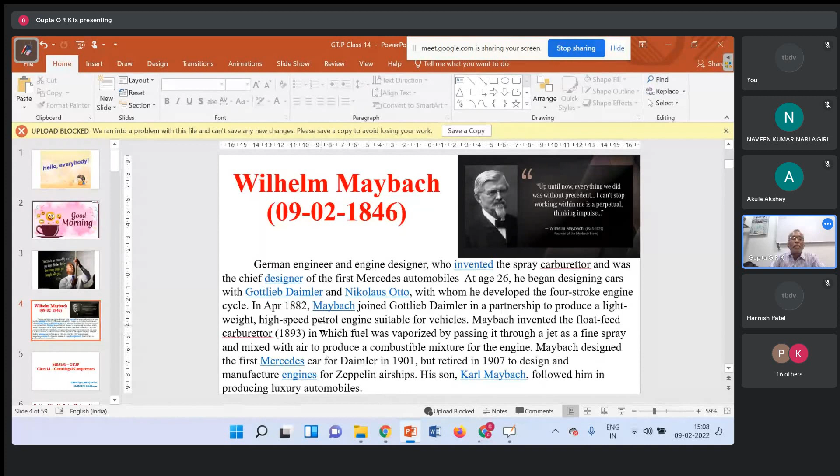Okay, today we deal with centrifugal compressors. And before going to that, we will see what we have discussed in the last class. So we have discussed about the basics of turbo machinery.

There, the velocity at which the fluid enters is the absolute velocity of the fluid, and the blade itself, because it rotates, has blade velocity, which is 2 pi n by 60, that is omega, angular velocity, but blade velocity is r omega. That's where you get the absolute velocity. And because it is rotating, the velocity at which the blade faces the fluid is called the relative velocity. We have seen the relation between absolute, relative, and blade velocities.

Each velocity, absolute and relative, is resolved into three mutually perpendicular components: one is axial, another is radial, another is tangential. So when it enters at some velocity and leaves at some velocity, whenever there is a change in velocity because of the change in momentum, there will be force in that direction. So there will be three forces: axial force, radial force, and tangential force.

Axial force, which is not useful for rotation, has to be taken care of by thrust bearings. Similarly, radial force is also not useful for rotation, but it has to be taken care of by either roller bearings or ball bearings. The third one, tangential force, is the one which is useful for rotation.

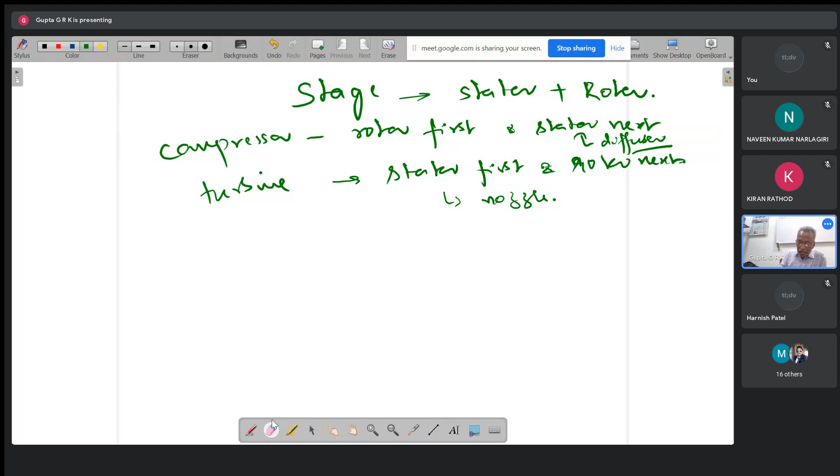Entry to the compressor is always axial. At the exit - if axial, it is an axial compressor. If radial, it's a centrifugal compressor. And otherwise, a mixed flow compressor.

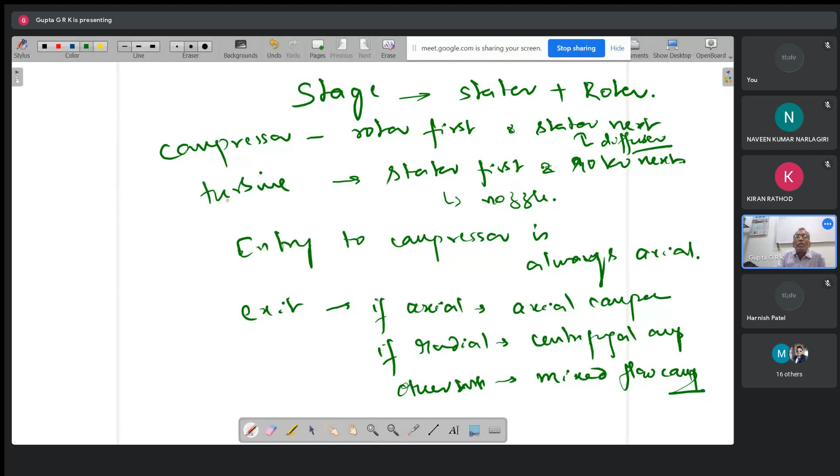Then another thing is the impellers - the rotor is also called the impeller, and the stator is called the diffuser. And we have three types of impellers.

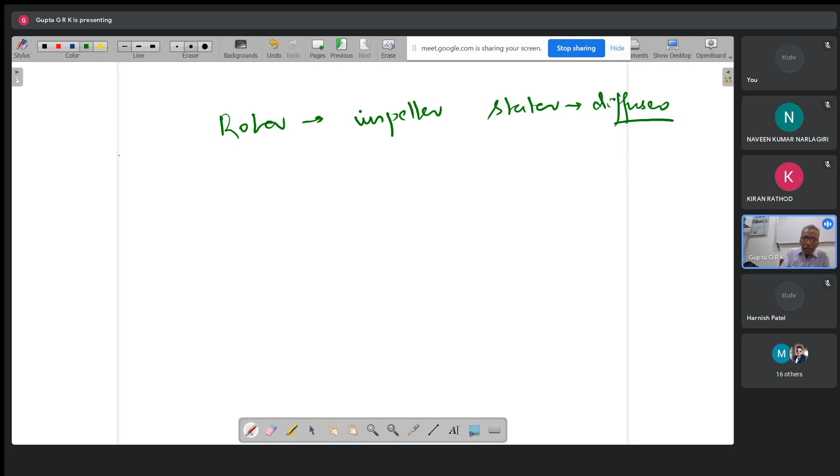This is the hub or shaft, suppose rotating this way, and the blades at the exit can be bent like this. If you see this bending - because it's rotating this way and the blades are bent opposite to that - these are called backward curved vanes.

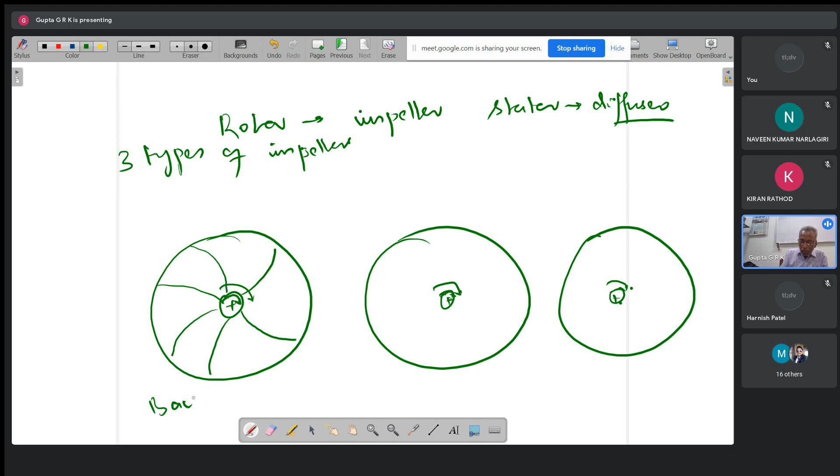And it can be like this - these are radial vanes. Forget about how it looks like at the center; at the exit, if it's like this and they are bent this way, with rotation in the same direction and blades also bent in the same direction, these are called forward curved vanes.

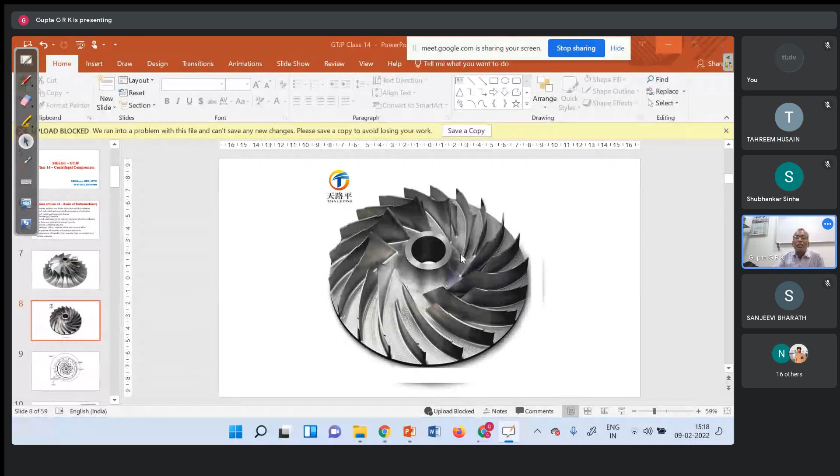If it is rotating in this direction, the blades are bent in this direction, so it is backward curved. Is it clear what I am telling? Yes, sir.

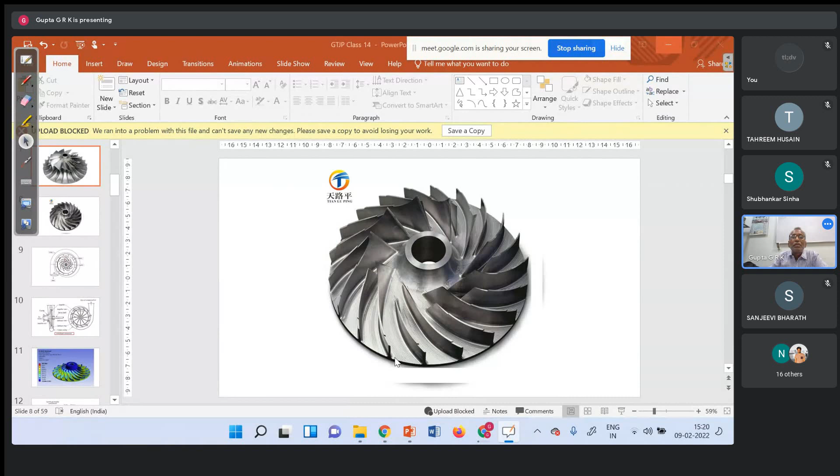It actually goes through, and also at the entry, before the entry to the impeller, there may be some vanes, which are called inlet guide vanes. I will tell you about that also.

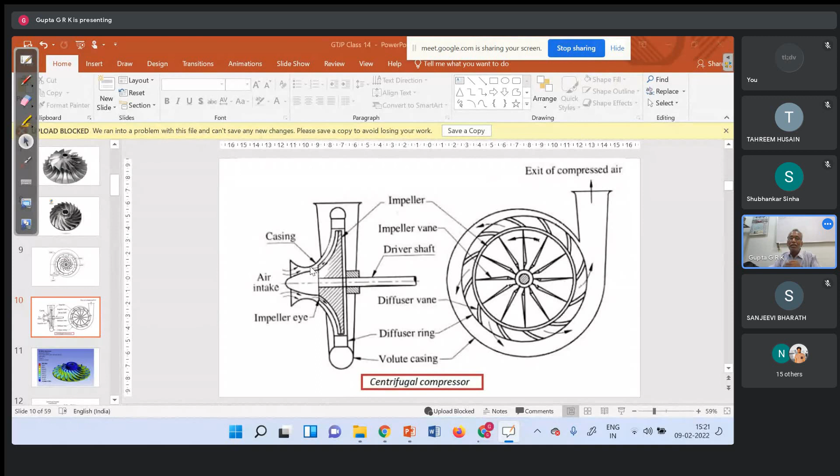So usually if I have all the components in an engine, so a compressor, first the air enters the bell mouth, then it enters the IGV, which are called inlet guide vanes. Then it enters the eye of the impeller, that is the inlet to the impeller. Then it enters the inducer. The inducer is like a transition piece from axial to radial direction, because it enters axially, then it turns to the radial direction. And then the impeller vanes.

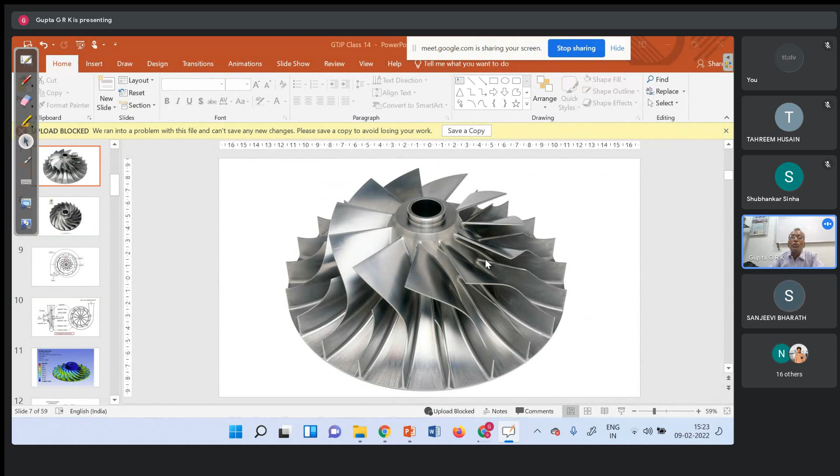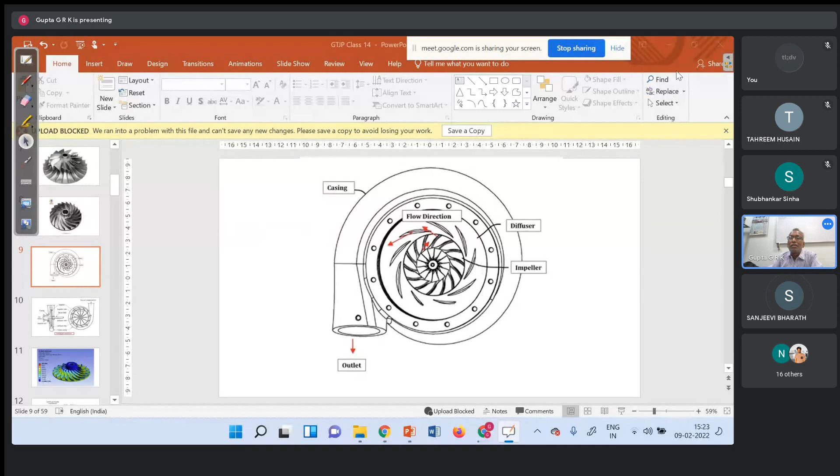Sir, for axial compressors, there won't be any inducer. Actually, this inducer and impeller is an integral part. Sometimes the inducer part is cast separately and the impeller vane separately, and they are welded together, or it can be a single piece. This bent portion, if this is the whole blade, this bent portion of the blade is called the inducer. We are talking about the centrifugal compressor only, not the axial compressor.

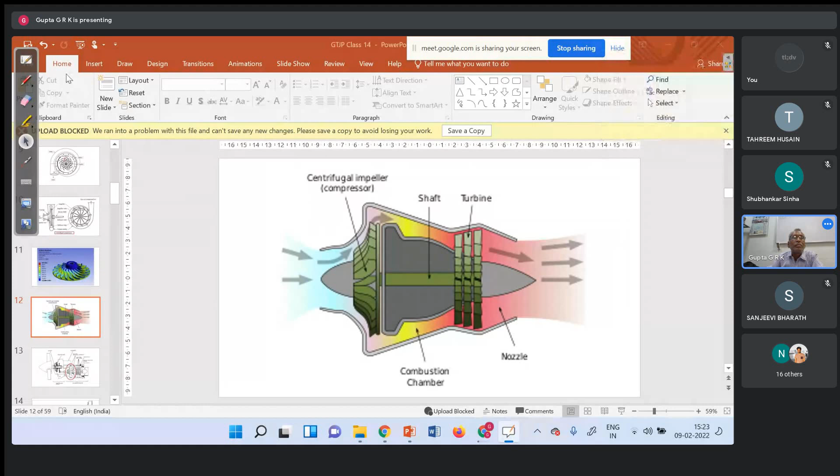Then impeller, and then there is what is called vaneless space between the impeller and diffuser. When it is coming out of the impeller and entering the diffuser, there will be some space, otherwise it will hit, isn't it? Between the diffuser and impeller there should be some vaneless space so that it rotates freely. So it enters the vaneless space, then the diffuser, then the volute casing, then exit. First it enters the bell mouth, then inlet guide vanes if at all present, then eye of the impeller, then inducer, then the impeller vanes, then vaneless space, then diffuser, then volute casing, and it comes out of the exit.

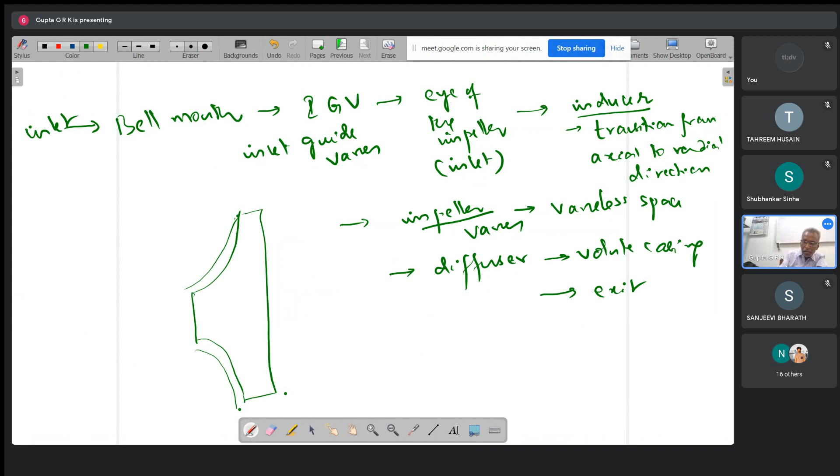Sir, could you please show the bell mouth? Bell mouth, okay, it's the entry. So suppose this is the impeller, and this is the casing, like this. And here at the entry, it will be like this, so it takes air from all over.

And here there may be IGV - this is bell mouth. IGV is optional - inlet guide vanes, they're optional. They might be present or might not be present. I'll tell you what is the use of that. There may be IGV, there may not be IGV.

This part is the shaft, and this part is the inducer, and this is the diffuser, like this.

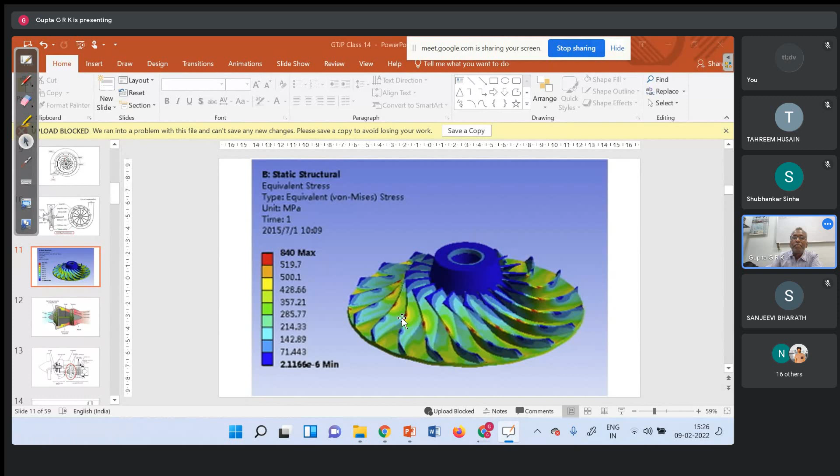So this is one CFD result showing the variation of stresses and all. So here, if you have a single compressor in a jet engine, it will be like this.

Just taking some photographs. If I have a multi-stage centrifugal compressor - normally now it is not used, but in olden days they used this. You can see now from the exit is radial, and the inlet for the next compressor is axial. So I have to turn it 180 degrees like this, then only it can enter into the next compressor. Because of that, we lose a lot of pressure here, so this is not preferred. Is it clear why this is the problem with this?

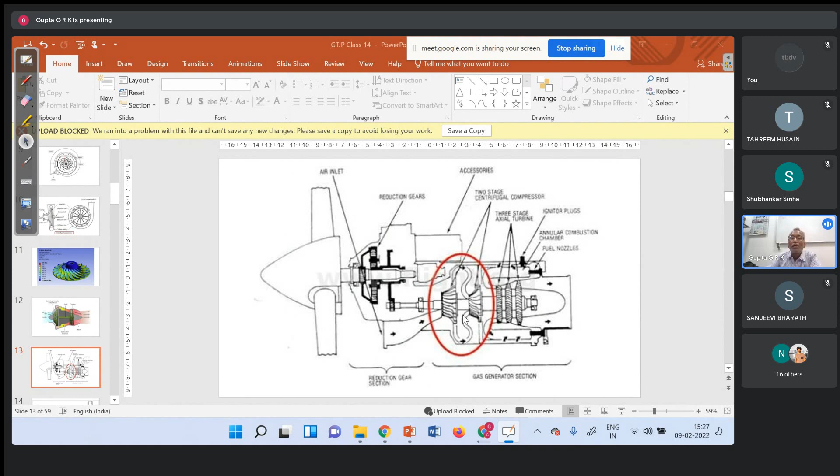So this is a turboprop engine, you can see. Previously we used to have like this. Now, actually, these are various types of axial compressors. Now this is axial compressor.

Presently, if you want a large pressure ratio, instead of having a multi-stage centrifugal compressor, which gives large pressure but we lose it, and the axial compressor, if you want a large pressure ratio, you have to have so many stages - if I have few stages of axial compressor combined with centrifugal compressor here, I will have a very large pressure ratio. And not only that, mainly centrifugal compressors are not preferred because of the frontal area.

I will show you. When you compare centrifugal and axial, we will make that comparison - centrifugal versus axial.

High stage pressure ratio - so usual normal is 4:1, and can be up to 6:1 using titanium blades. For high stresses, if I can use blades which can withstand stresses, I can go up to 6:1. But axial compressors have low pressure ratios, some 1.14 to 1.3. That's a small pressure ratio.

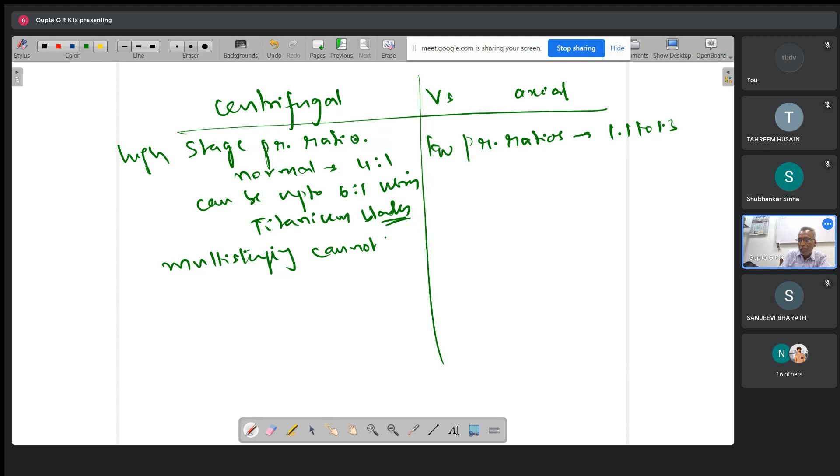But here, multi-staging cannot be done with any number of stages for centrifugal. Therefore, if the overall pressure ratio cannot be met by a single stage centrifugal compressor, we go for axial compressor. So if I want some 10:1, instead of having 2 stages of centrifugal compressor, you can have some 6 stages of axial compressor like that.

So that is preferred. And another important thing is - an axial compressor will be like this, and you will have a rotor, stator attached to the casing, and a rotor and a stator. Like this, I will have a number of stages, and air enters like this, and leaves like this.

And so if I have a centrifugal compressor, if mass flow is equal to rho A C - I can say CA because it is coming axially like this. So if I have some axial velocity and density, with the same density and axial velocity, I want to have an axial compressor or a centrifugal compressor.

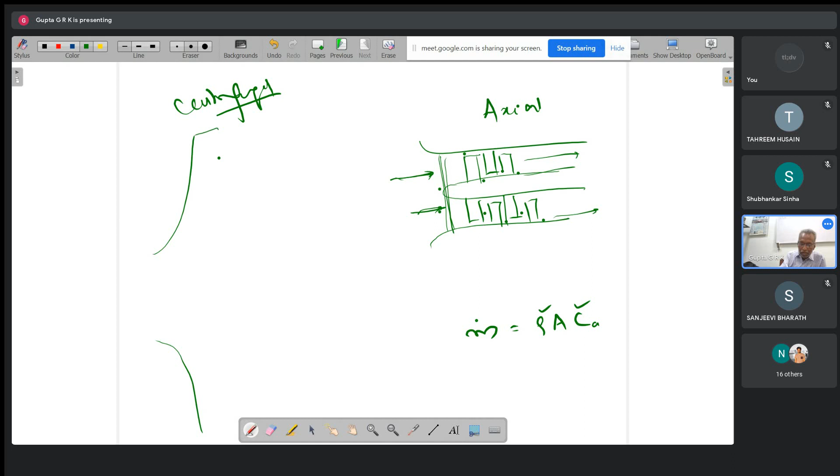So if I want this much of inlet area, and if I have a centrifugal compressor, it will come like this. If this is the inlet area, you can see how much is the exit area. But here, inlet area and exit area are almost the same, or sometimes it will be converging also, because it is getting compressed - the last blades will be smaller and the initial blades will be taller. So frontal area is very high for the same mass flow.

Is this point clear? This is very important.

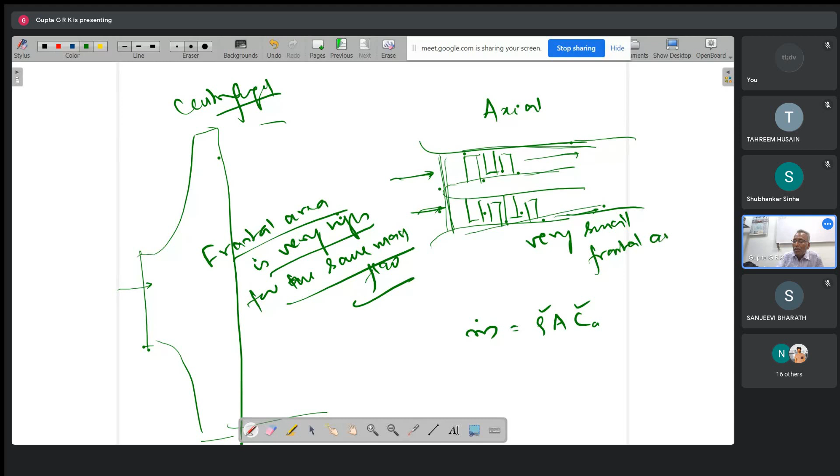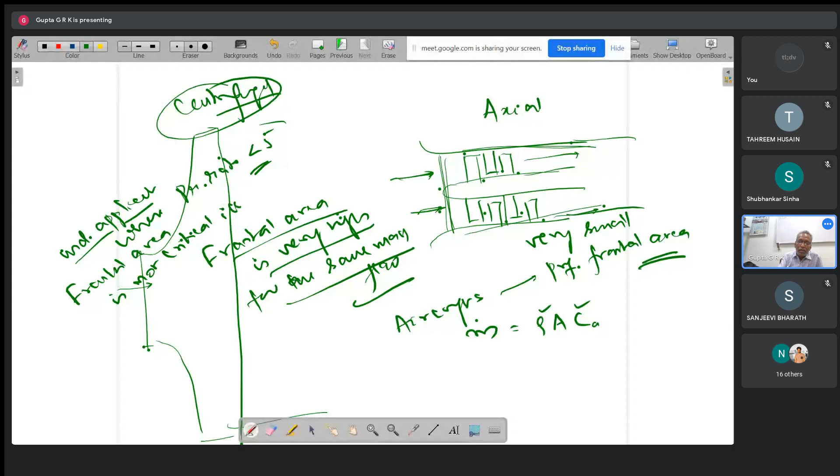That's why in aircrafts, axial is preferred. But in industrial gas turbines, industrial applications, where pressure ratio is less than 5, we always prefer centrifugal compressor. Here, frontal area is not a problem. In industrial applications, frontal area is not a critical issue. But in aircrafts, frontal area should be small.

Is this clear? Any point, if you don't understand, ask me. When I have very large pressure ratio, initial stages can be axial stages, and when the area gets reduced, I can have a small centrifugal compressor. So whatever pressure is here, that will be multiplied by 4 times, so I can have very high pressure ratio. Because the inlet gets reduced, exit also can be reduced. Compared to this inlet area, now inlet area is small, so I can go for centrifugal compressor. So this is the way we can have it.

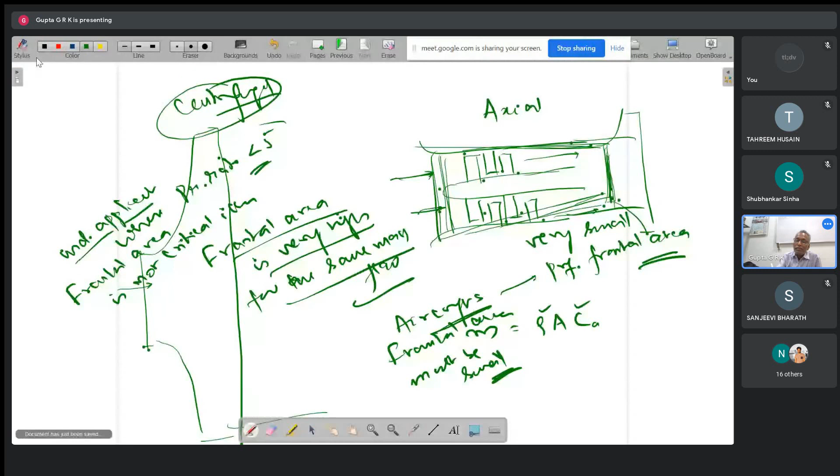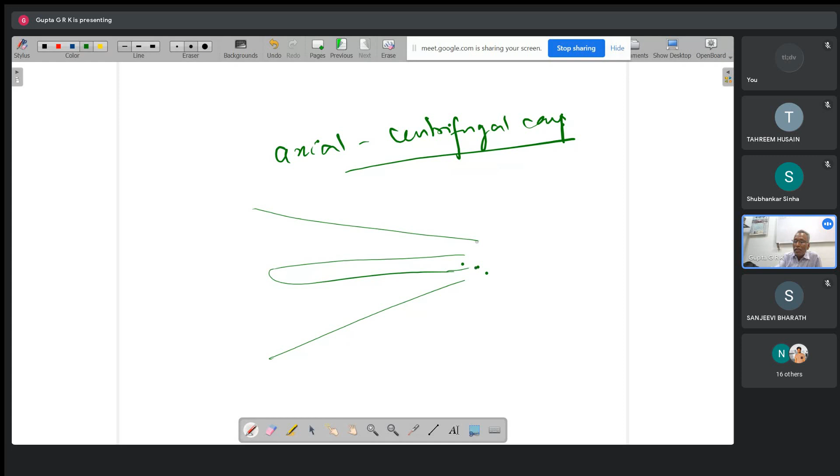You can see axial compressor has decreasing area, the last stage will have very small blades. And here if I have an impeller, frontal area somewhat increases, but not much. This is called an axial-centrifugal compressor. So I can have centrifugal stages like this, and axial here, and centrifugal here, like this. This is the way I can have it.

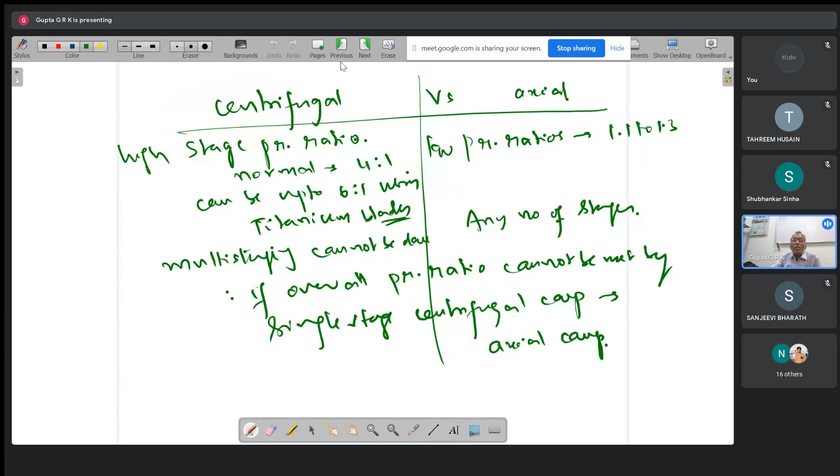Okay, when I compare the other things, I'll go to the next page. Here, this is very simple to design, fabricate, maintain, and cheaper. So this (axial) is costly, difficult to design, fabricate, all these things.

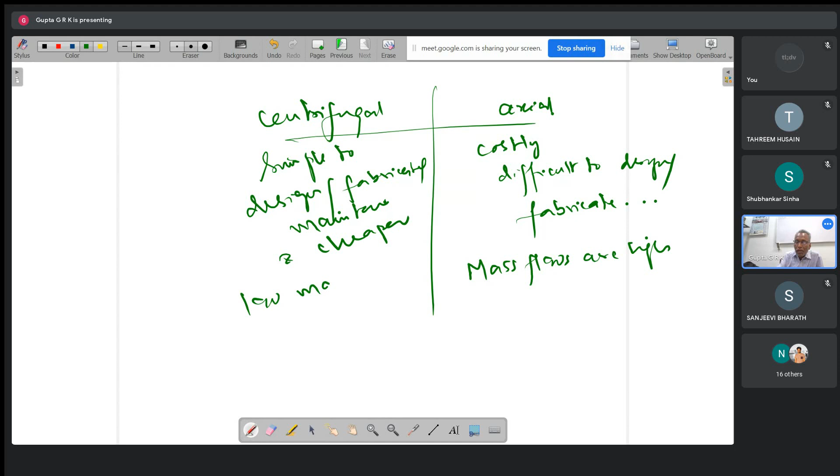Mass flows here are very high for axial, compared to centrifugal which has low mass flow. Always in turbomachines, the mass flow and pressure ratio developed are inversely related. Whenever a machine gives large pressure ratio, it carries only less mass flow. If it carries more mass flow, the pressure ratio will be less. Also, power is equal to gamma Q H, where gamma is the specific weight, Q is the volume flow, and H is the head development. For a given fluid, gamma is constant, so Q and H are inversely related, volume flow and head development. Head developed is pressure ratio, volume flow represents mass flow. So they are inversely related.

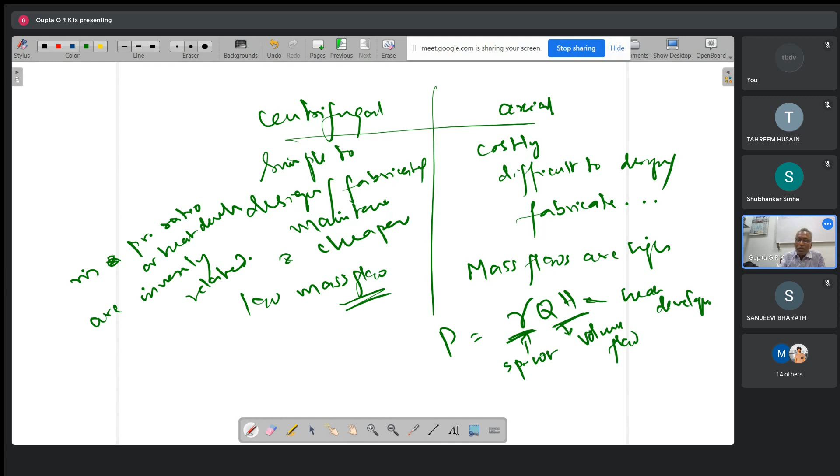And coming to efficiency, axial has high efficiency, and this (centrifugal) will have low efficiency. Axial compressors have that advantage. And another thing is the range of mass flow. How it looks like is, suppose if this is the mass flow, and if this is the pressure ratio, so it looks a bit like this.

So this is something like axial, and this is like centrifugal. Here the range of mass flows - the range of mass flow for axial compressor is narrow, and here range of mass flow is wide. The operating mass flow range is wider for centrifugal compressor and narrow for axial compressor. That is another reason why we prefer it in industrial applications - we may change the mass flows very much, but for aircrafts, because the cruising speed is constant, the mass flows are almost constant during cruising. So that is the reason we prefer centrifugal for industrial applications.

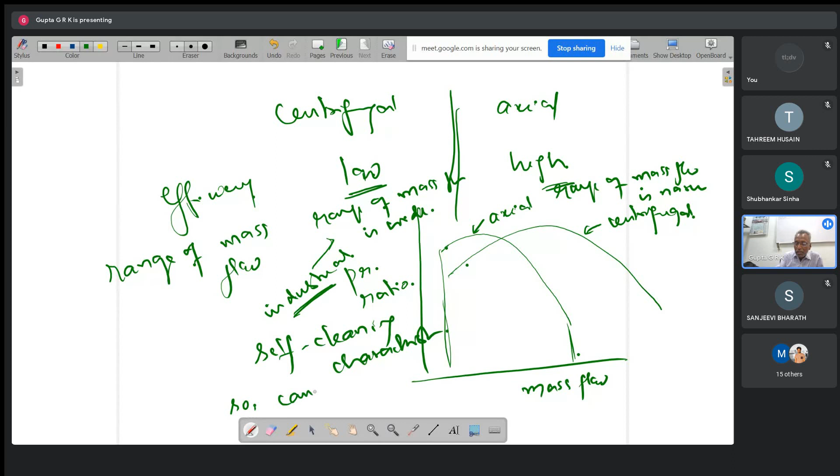Another reason why this is useful for industrial applications is it has self-cleaning characteristic. Contaminated fluids or slurries, muddy things, can be used with centrifugal compressor. Any type of horrible fluid also can be used with the centrifugal compressor, because when I have blades, whether backward, forward, or whatever, it throws away the material. Nothing gets stuck to the blade, it throws by centrifugal force. And the blades also, because they are very simple blades, no problem - even if something gets stuck, it will not be a problem, it will be thrown away. But when you come to axial compressor, where I have aerofoil blades,

centrifugal effect is not much, and if there is some mud or something stuck to the blade, the profile changes, and because of this the performance falls. So if you see, centrifugal compressor is applied and preferred in industrial applications for low flow and high pressure ratios. It has self-cleaning characteristic, it can be used with any type of fluid, and it has wide range of mass flows it can use. Only thing is efficiency is a little bit low, but the manufacturing, maintenance, fabrication - all these things are cheaper and it is widely used. So these are the advantages of centrifugal compressor. Any questions?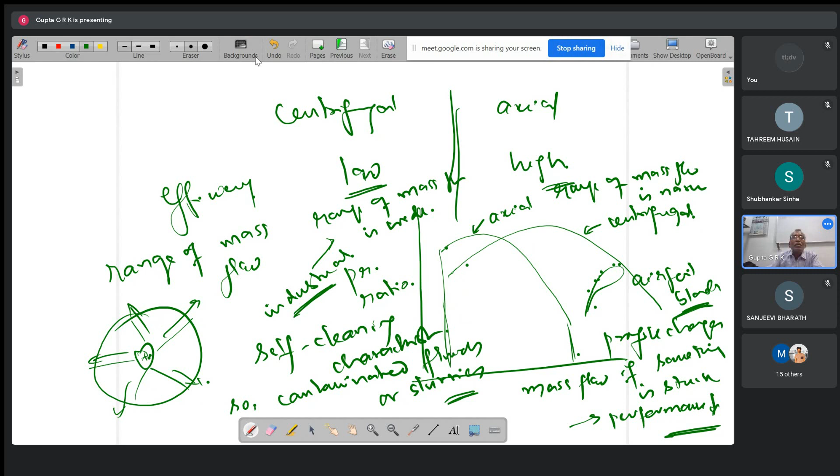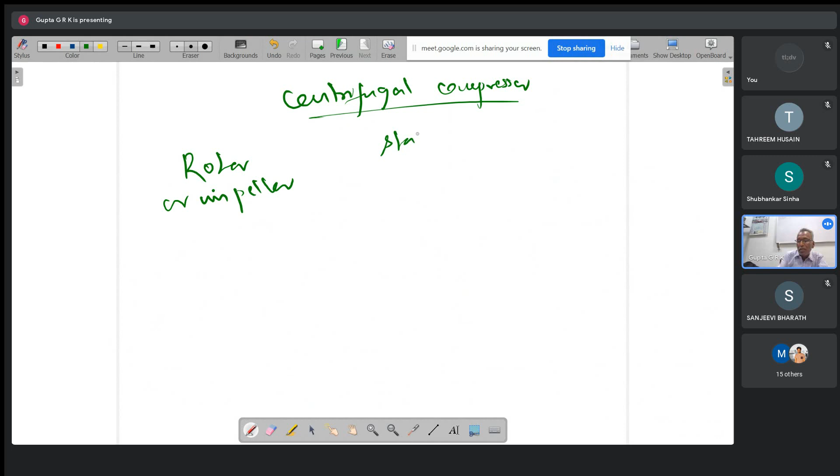Okay, now we concentrate on centrifugal compressor. We have a rotor or impeller, and then a stator or diffuser. Work is given here, work is given to the rotor, so work is negative because this is connected to the shaft.

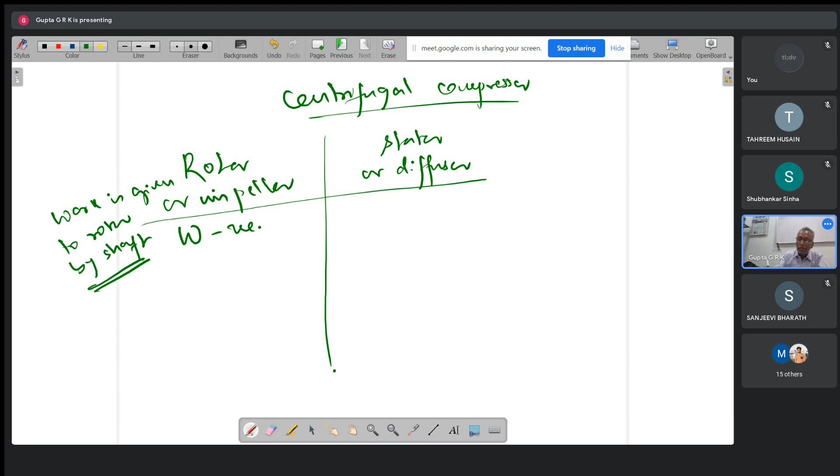So by shaft, work is given to this. Because of this, if you take the first law, delta Q is equal to dH naught plus delta W. So for a compressor,

delta Q is 0. I am not heating it or taking away any heat or anything. So delta Q is 0. So delta W, or W, is equal to minus dH naught, or W12 is equal to, if I take

this is impeller and this is diffuser, and before impeller if I take state 1, after impeller state 2, and after diffuser state 3. So W13 is equal to H03 minus H01. H03 will be large because I am giving some work to this, so H01 will be less, and H03 minus H01 is equal to Cp into T03 minus T01.

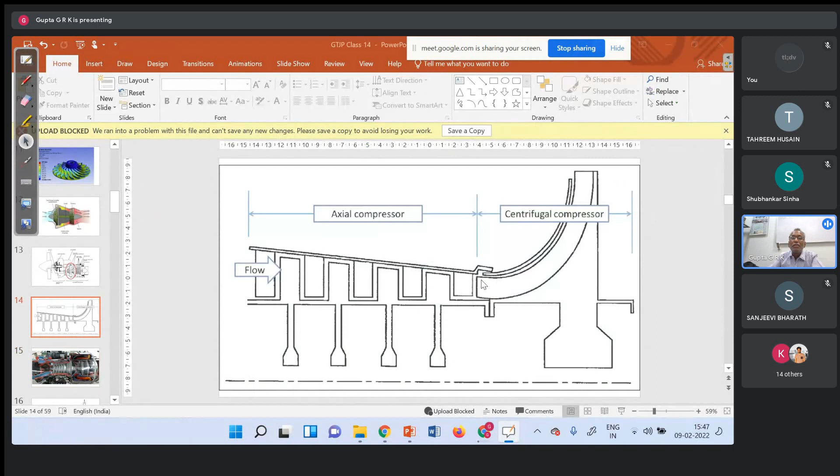And coming to this, okay, this is like this. And here you can see, because the same figure is given here — this is the axial compressor and this is the centrifugal compressor. And these are the turbines which run the compressors.

So this is the difference between axial flow compressor and centrifugal compressor. So you can see that the frontal area will be large. Now you can see this is the inlet, the bell mouth will be like this. This is IGV. And this is the impeller. Actually it should be drawn like this — this part is the inducer and this is the impeller blade. And diffuser — there are actually two types of diffusers.

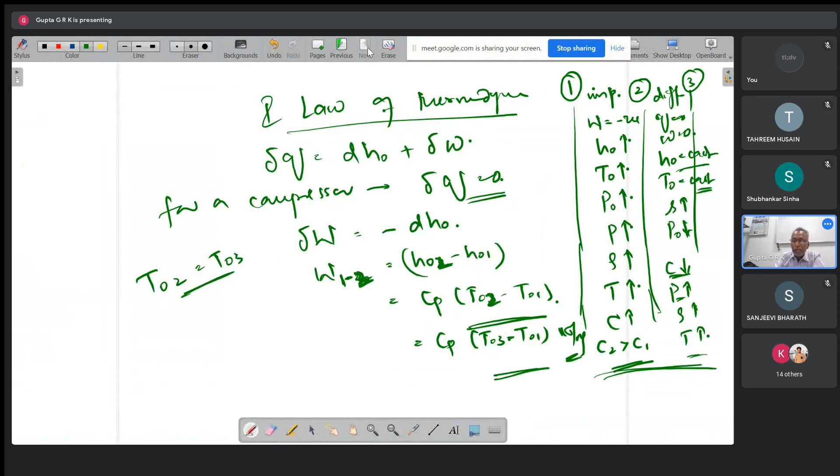What is called a vaned diffuser, then vaneless diffuser. Whatever I have shown previously — here these are vanes. I need not have anything; suppose these vanes disappear. So what happens? The area from here to here, because the radius increases, there will be increase in the area. So what happens is it gets diffused.

As the area increases, velocity decreases and pressure increases. So that is the vaneless diffuser. But if there is sudden diffusion, as I told many times, diffusion means adverse pressure gradient, so there will be disturbance or losses. It should not be sudden. So if it is gradually diffused, then the efficiency will be better. That's why sometimes they use a vaned diffuser.

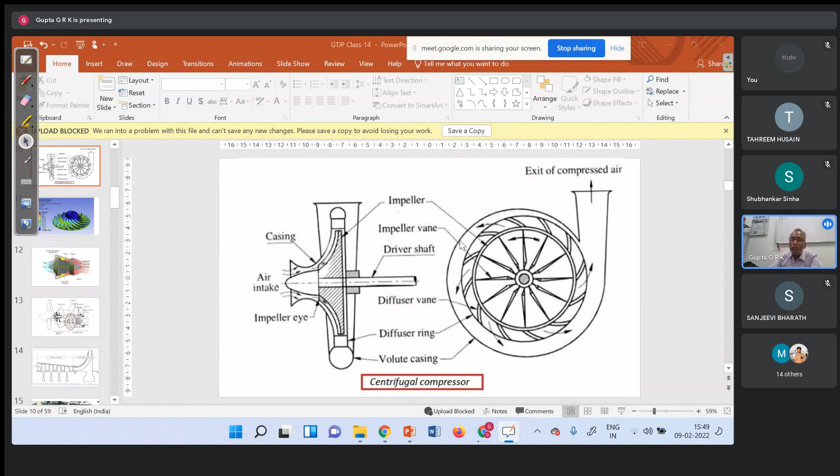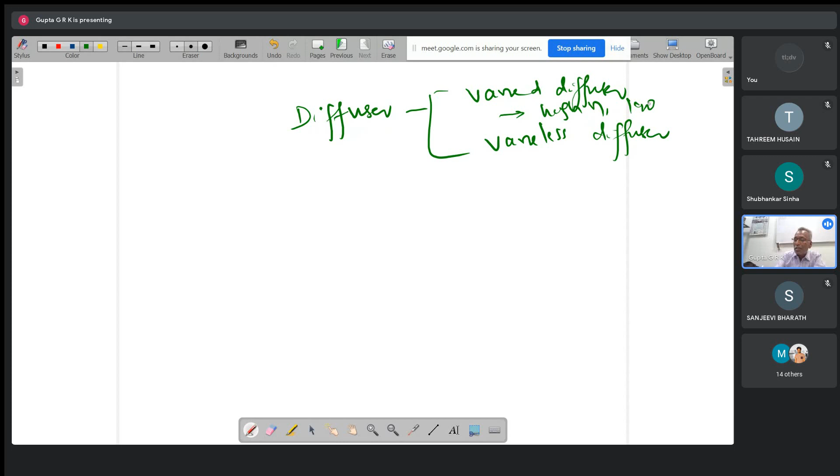So vaned diffuser will have high efficiency and low losses. This vaneless one has low efficiency and high losses. But the vaned diffuser is expensive because I have to design the blades and fix them there, I have to fabricate all those things. Vaneless means just increase the space, that's all, there is nothing else. So sometimes depending on the application and the cost you want, you can have a vaneless diffuser also.

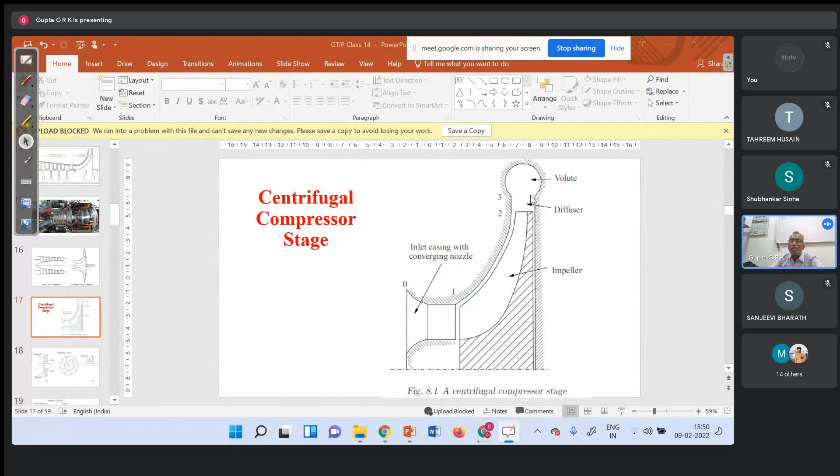So here, if there is a diffuser, vaned diffuser, I will have a blade here. But if it is not there, it is vaneless diffuser.

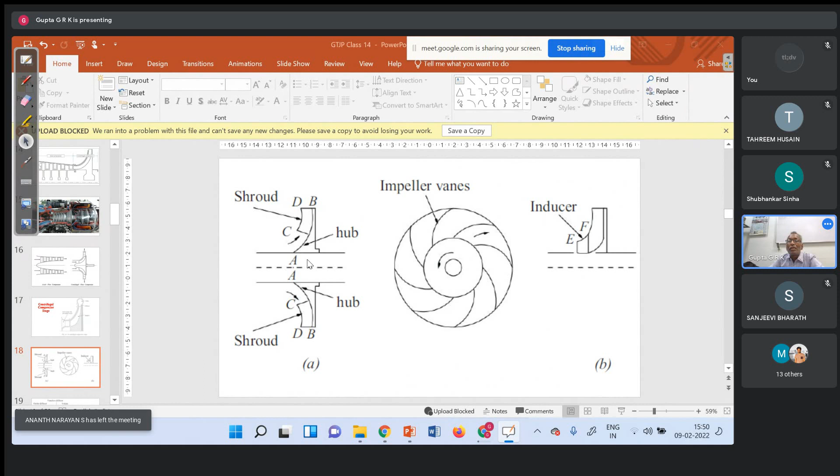Okay, so another thing I will tell you. This part is inducer, as I told. These are impeller vanes.

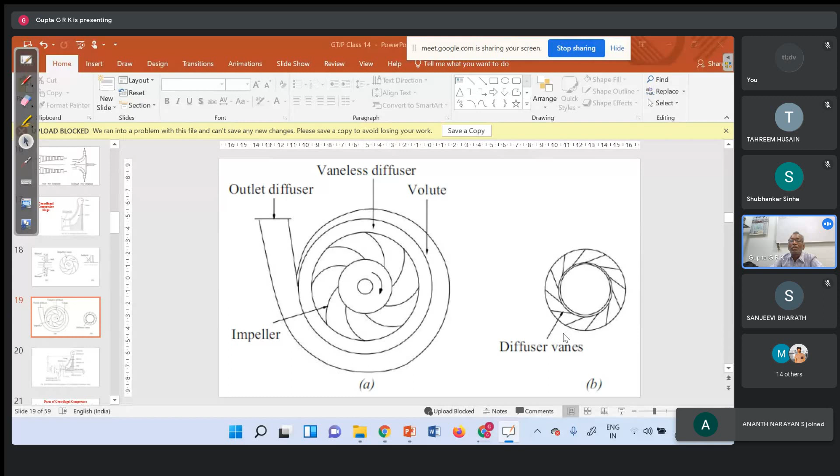Okay, this is called as shroud. This casing in which it is rotating, this is called as the shroud. Shroud means a cover-like thing.

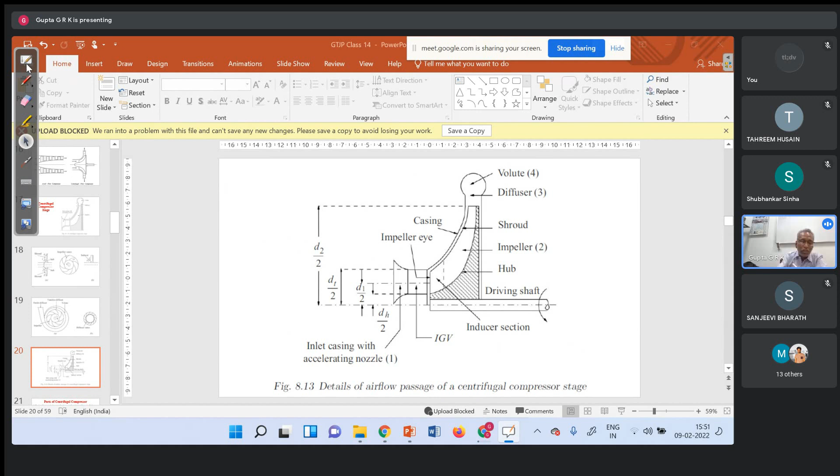And here for the impeller, the lower part is called as hub, the upper part is shroud, or tip also. Sometimes we call it as tip. This is tip of the eye, the eye tip. This is called as impeller tip. So you have to be careful about the notation or the terminology.

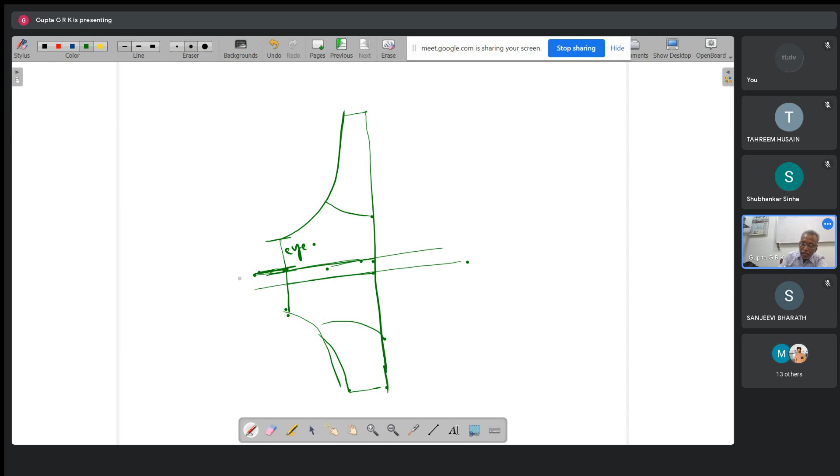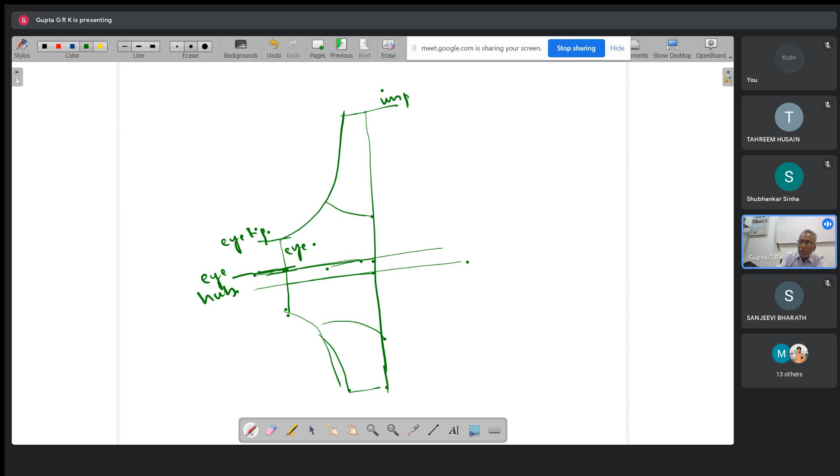Okay, this is the shroud, and this is eye. If this is the part it enters, this is called as eye hub. This is called as eye tip. And this is called as impeller tip.

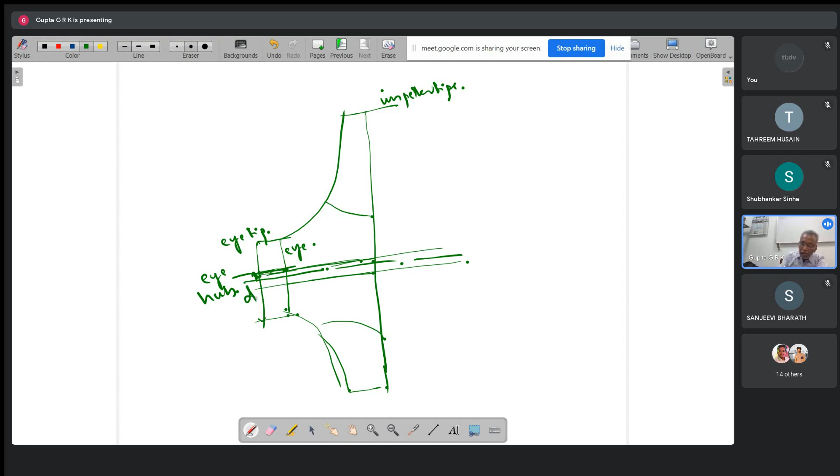Okay. And so the diameter or the radius, okay this is D1, inlet diameter. And this is exit diameter, or impeller diameter. This is equal to D2. And

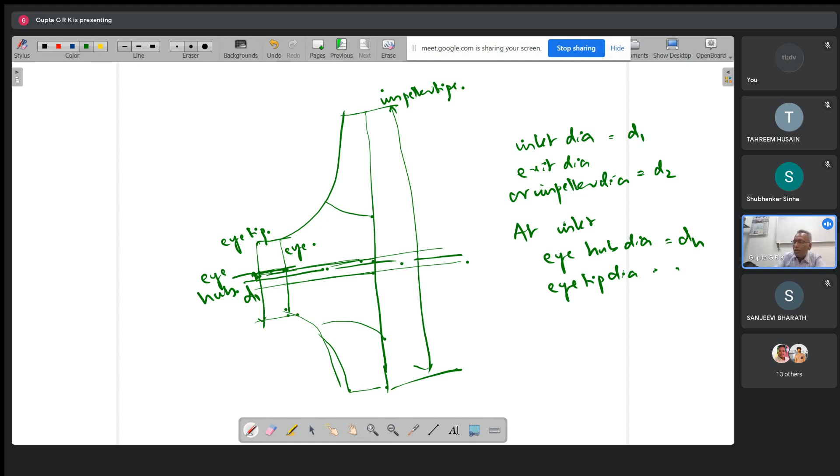at the inlet, eye hub diameter is equal to DH, and eye tip diameter is equal to DT. And okay, this is D1. That is D1 is equal to DT plus DH by 2.

And DT minus DH, DT minus DH is 2 times the eye height. Okay, H I can take, the height of the blade here.

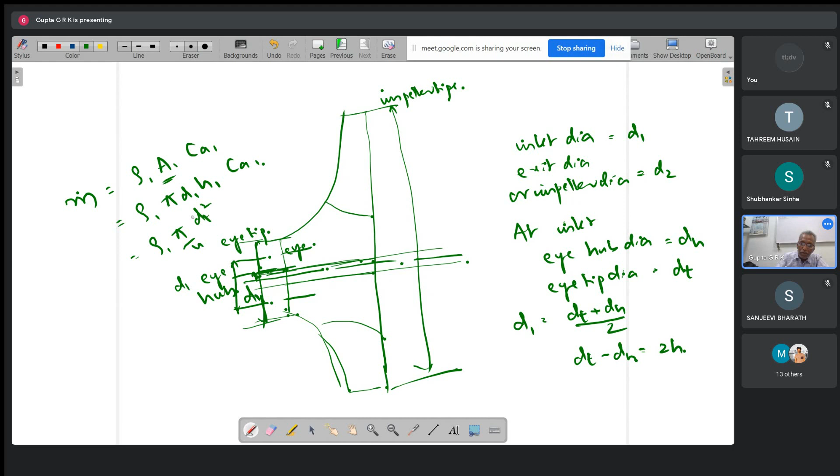And so if I want mass flow, rho1, A1, CA1. And rho1, this is equal to pi D1, H1, CA1. I can write like this, or rho1 into pi DT square minus DH square by 4, CA1.

Like this I can write. That is the annulus area. Okay, the blades are there in annulus way, and if it is going like this, outer diameter is DT, inner diameter is DH, between which I have the inducer blade. Through this annulus area it is going. So pi into DT square minus DH square by 4.

And so this can be written as DT square minus DH square by 4, means DT plus DH by 2, DT minus DH by 2. So DT plus DH by 2 is D1, and DT minus DH by 2 is H1. So this becomes D1 H1. That is what here we get. Okay, so this is the way we get it. This A1 is the inlet area.

And if this is D2, and this is called as impeller width at the exit, this is B2. Impeller passage at the exit.

Okay, so here this is like this, the whole circumference, it will be like this. So what is the area through which the flow is coming out? So flow is coming out like this. So what is the area through which it is coming out? Pi D2 into B2. Yeah, that's right.

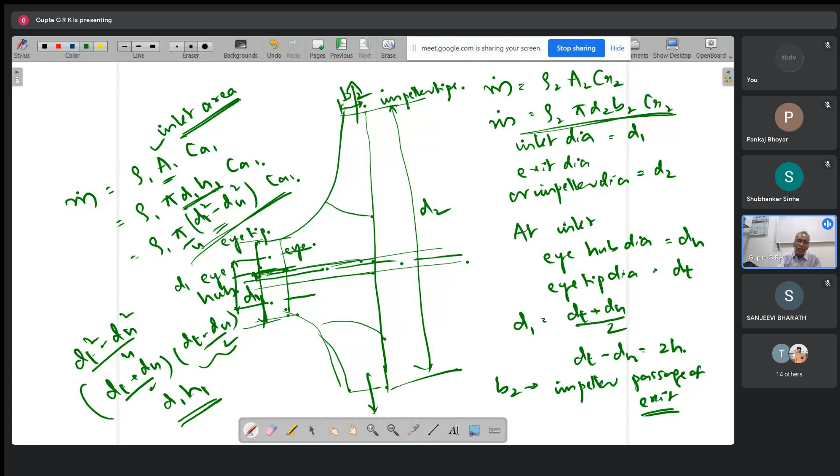So if m dot is equal to rho2, A2, and here the direction coming is CR2, the area perpendicular to the direction of velocity, or the velocity perpendicular to the area to which it is coming. So the component is CR2, and A2 is pi D2 B2. So this is mass flow at the exit, and at the inlet I can use this, or I can use this based on what data is given. Is this clear?

Okay, and another thing, coming to the TS diagram. So if I have this, if I have impeller exit here, 1, 2, 3.

It is like this for static conditions. If I want stagnation conditions, so at 1, I add C1 square by 2Cp, so I will get 01. Similarly, at 3, C3 square by 2Cp. C3 will be almost equal to C1 because C2 will be large since I am giving work, and in the diffuser I convert that kinetic energy to pressure energy, so again C3 will be small only. So C1 and C3 are almost the same, so this will be 03.

And so if I do like this, this is 03 dash. And we have seen that T02 equals T03 because of the diffuser, so T02 should be the same, meaning T02 should be here, so it will be 02. So what is this then? This is C2 square by 2Cp. You can see that C2 will be large, and that will be reduced to C3 in the diffuser.

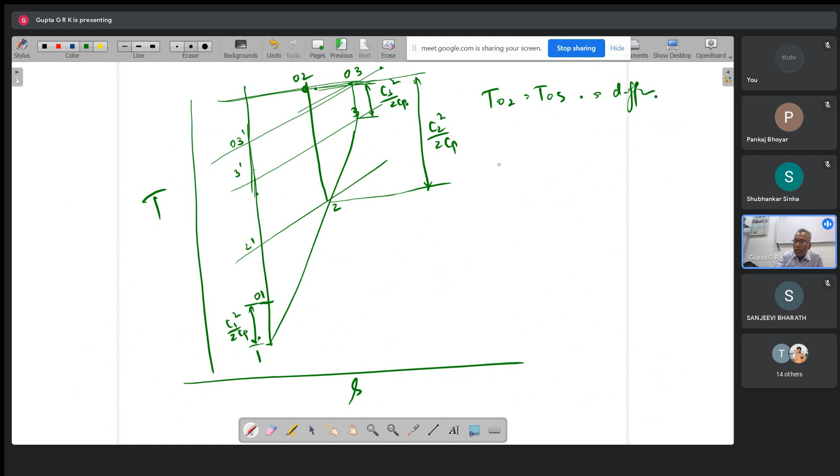Okay, so if I take compressor efficiency, this is equal to T03 dash minus T01 by T03 minus T01. Okay, that's what normal. Okay, I will put here like this. Okay, so this line and this line, if you see, it is like a compressor we got in jet propulsion or gas turbine, like this.

And so T03 dash minus T01 is equal to eta C times T03 minus T01. So T03 dash is equal to T01 plus eta C into T03 minus T01. And this T03 minus T01, because W is equal to Cp into T03 minus T01, so this can be written as W by Cp.

And dividing by T01, T03 dash by T01 is equal to 1 plus eta C W by Cp T01. And we are interested in pressure ratio, so P03 by P01 is equal to T03 dash by T01 to the power of gamma by gamma minus 1, that is equal to 1 plus eta C W by Cp T01 to the power of gamma by gamma minus 1. This is pressure ratio.

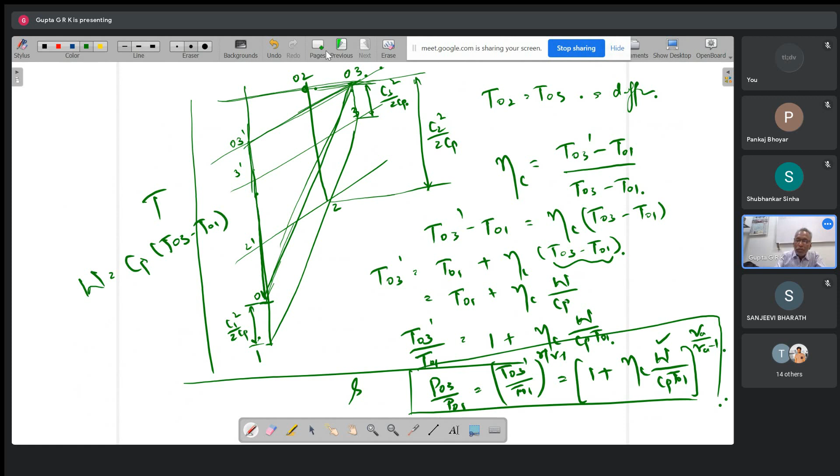But here now the task is, what is W? W I want in terms of velocities. Okay, so before going to that, we will see the velocity triangles for different types of impellers. So we got backward curved, radial, and forward curved.

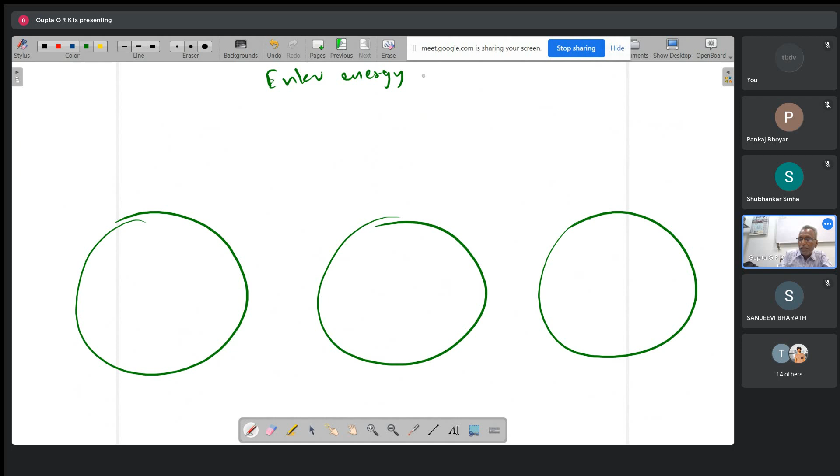And another thing is, we know that from the Euler energy equation, W is equal to U2CW2 minus U1CW1. Okay, I can write U1CW1 minus U2CW2, but it will be negative, right? Because I am giving work, U1CW1 will be less and U2CW2 will be more. So I am writing it like this.

So here at the inlet, C is axial, meaning C1 equals CA1, CW1 equals 0. If it is axially entering, there will not be any tangential component. So CW1 is 0. If CW1 is 0, this will become U2CW2, this will go off.

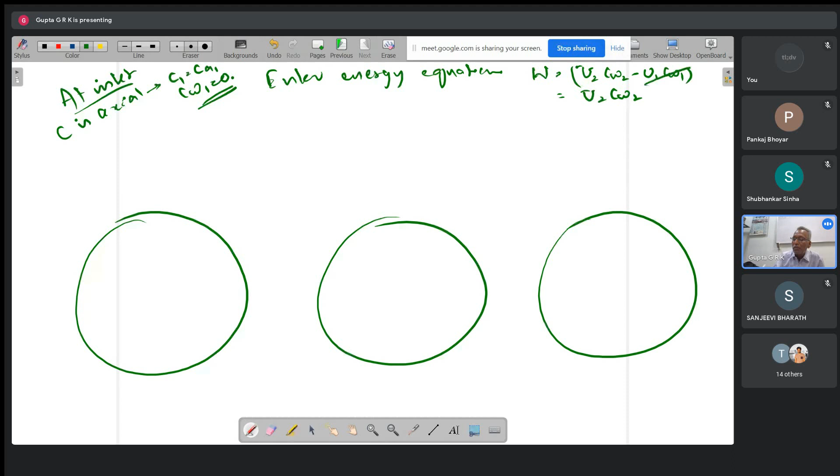Okay, so now I want to see how the exit velocity triangle will be. Because now CW1 is not there, I will not draw the inlet velocity triangle; I will discuss that later. First we will see how the exit triangle will be. It is like this, and I told you the blade velocity will be horizontal.

And again, if you want to draw the velocity triangle with base down or up, it is left to you. Okay, normally base down will be better, so I will draw like this. Okay, and this is rotating in this direction, meaning left to right, so this is U2, I can write. And what is the velocity direction? Velocity direction is in this way.

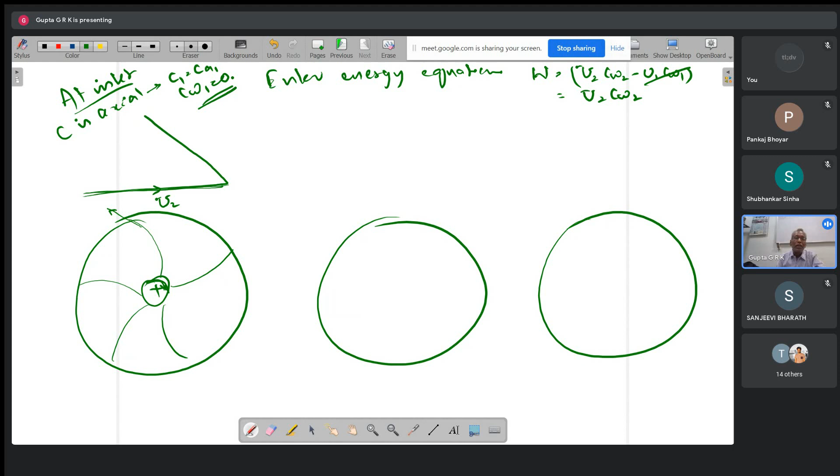And V plus U equals C. Okay, so it is this way, it is going like this. I have to add V2 to U2. Okay, so V is in this direction. And if I add these two, I'm going to get C2 here. Any doubt, you ask me, right?

That is C2. And if I draw vertical, at the exit, because it is going radially, the axial component will not be there. Okay, and so this is equal to CW2, this is equal to VW2. And this angle is the angle of the vane angle at the exit, so this is beta 2.

Relative velocity angle is always equal to blade angle, so blade angle is beta 2. Beta 2 is the vane angle at exit. This will always be equal to the relative velocity angle, you have to be careful about that. Okay, and this component is CR2, the radial component, or VR2. Okay, this is the way the exit triangle will be for backward curved vanes.

Okay, now if I have radial vanes like this, and again if I draw U2 like this, same length, how will V2 be now? V2 will be vertically coming out, and this angle is 90 degrees. Beta 2 is here less than 90, and here V2 will be like this, and this is beta 2 equal to 90 degrees. Again, if you add these two, I will get C2. V2 equal to VR2 equal to CR2, and U2 equal to CW2, and VW2 is 0. Like this. Any doubt you ask me, right?

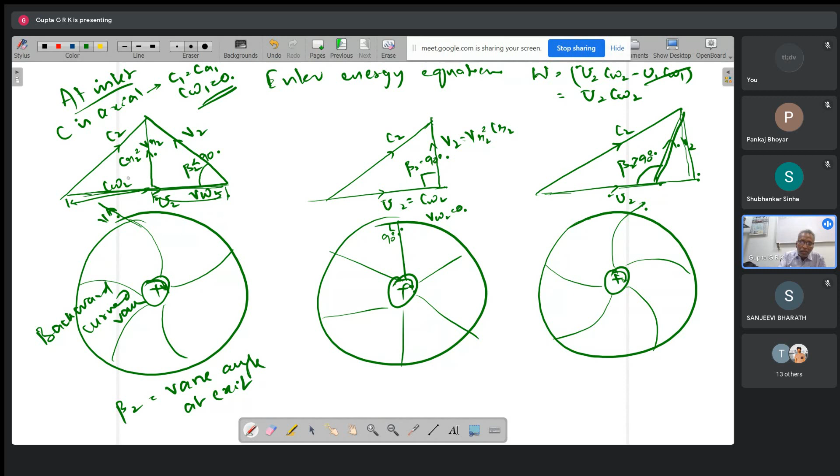So here U2 equal to CW2. Here CW2 equal is less than U2. Here CW2 is U2. Here CW2 is greater than U2. And this is VW2. And this vertical one is VR2 or CR2. Okay, this is the way the exit velocity triangle will be.

And so here I will write CW2 is equal to, you will see the first triangle, I will write it as U2 minus, and this particular one is VR2 cot beta 2, because cot beta 2 is VW2 by VR2. So VR2 is nothing but CR2. So VW2 is CR2 cot beta 2. I will write like this.

And you may think why I am using backward curved vane. This is true for radial vane and also the forward curved vane also. Why? Because if you take this, CR2 cot beta 2. What is beta 2? Beta 2 is 90. What is cot beta 2? It's 0. So CW2 equal to U2.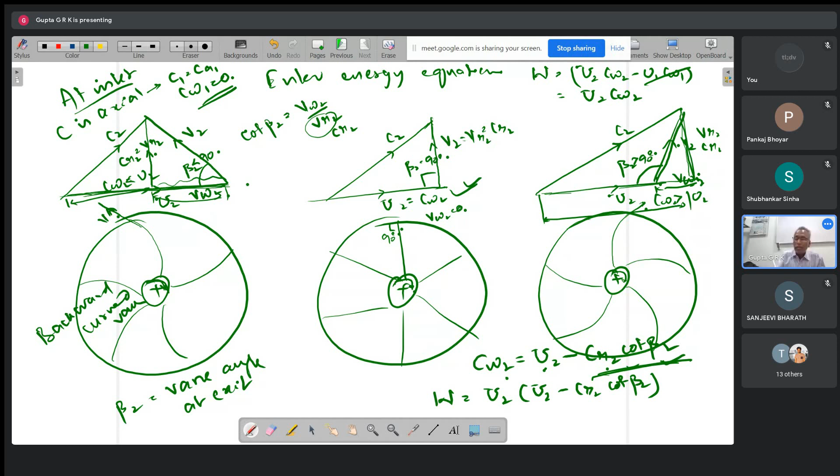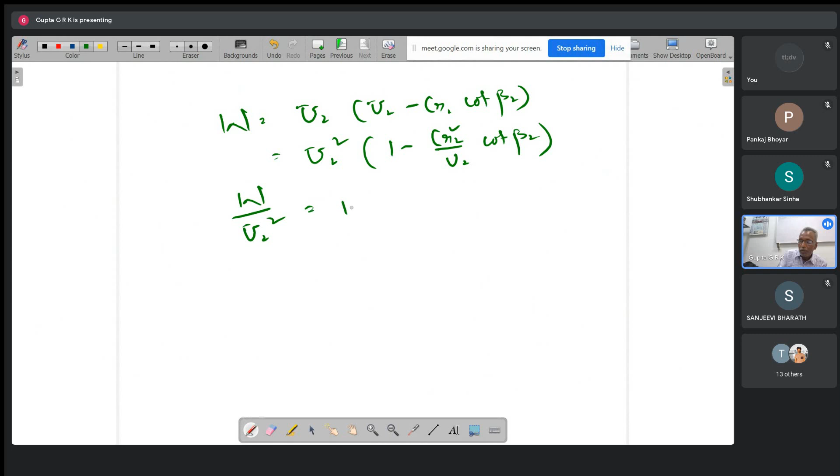Yes sir. Okay, so now W is equal to U2 CW2, right? U2 into U2 minus CR2 cot beta 2. So if I draw, okay, so if I write this as U2, I take common and I write it as U2 square into 1 minus CR2 by U2 cot beta 2. Like this. And CR2 is a component which represents flow. Here again I will write this as W by U2 square is equal to 1 minus CR2 by U2 cot beta 2. Okay, this is non-dimensional work.

And this CR2 by U2, this is also non-dimensional and this is the flow component of velocity. It gives the flow, right? So this is what is called as flow coefficient. And this is called as work coefficient. So this is written as psi2 is equal to 1 minus phi2 cot beta 2. Okay, flow coefficient is phi2 and the work coefficient is psi2. Okay, this is the way they are related.

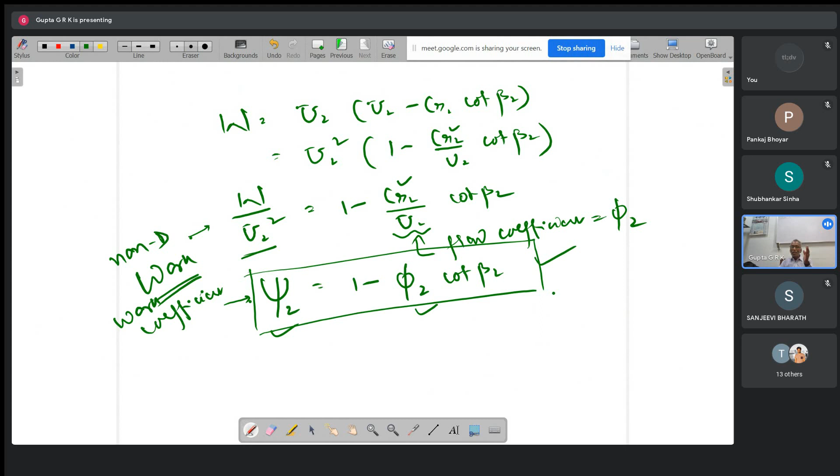And this is true for all the three machines. Okay, this is like head, this is like flow. So whenever you draw a graph for a pump or a compressor or anything, we will say head-flow characteristic. Head in the y-axis and flow in the x-axis, or non-dimensional work coefficient versus flow coefficient. Like this we will draw. And so psi2 is equal to 1 minus phi2 cot beta 2.

If I take like this, and if I draw a graph between phi2 and psi2, okay, when there is no mass flow, phi2 is 0, so psi2 is 1. It will become, okay, something.

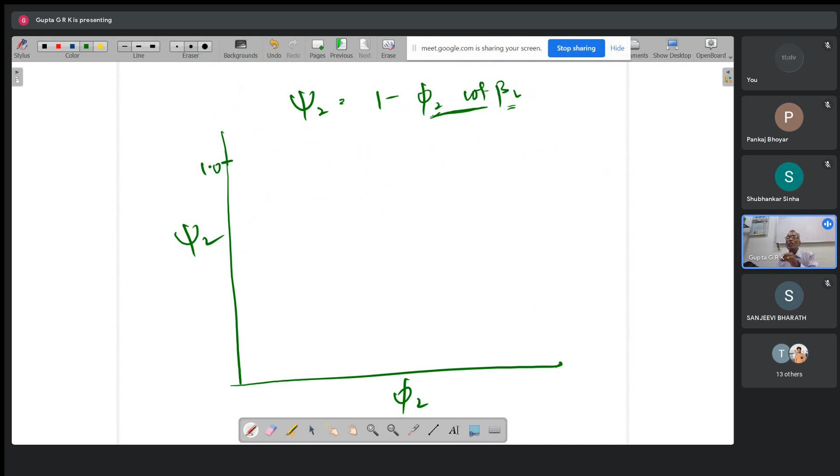Okay, so as mass flow increases, if I take a backward curve when beta 2 is less than 90, so cot beta 2 is positive. So what happens, as phi increases, this becomes negative and psi decreases. Am I clear or not? Cot beta 2 is positive. Phi2 cot beta 2 is positive. As phi increasing, the phi2 cot beta 2 increases. So 1 minus that decreases. Is that clear?

Yes sir. So it decreases and decreases and decreases like this. This is backward curve. As phi increases, psi decreases. Suppose if I take radial, beta 2 is 90, whatever be the flow. So beta 2 90 means phi2 cot beta 2 is 0. Psi2 is 1, whatever be the phi2. So it will be like this. This is for radial vane.

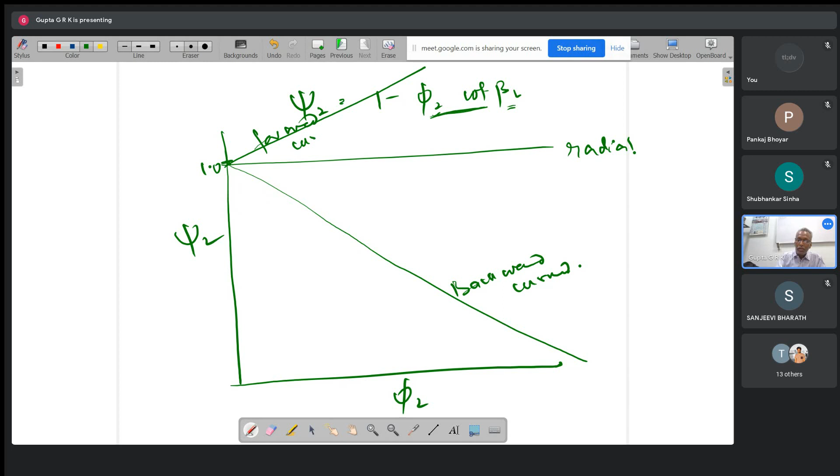And if you see forward compress, the forward curve, beta 2 is greater than 90, cot beta 2 negative. So phi2 cot beta 2 is negative, and 1 minus a negative quantity means plus. So for any phi, I am adding something to psi. As phi increases, the addition increases. So I'm going to have something like this. Is this clear? Yes sir.

So this is the general way I will get. Actually, I will stop here. I will continue in the next class. Any questions till now?

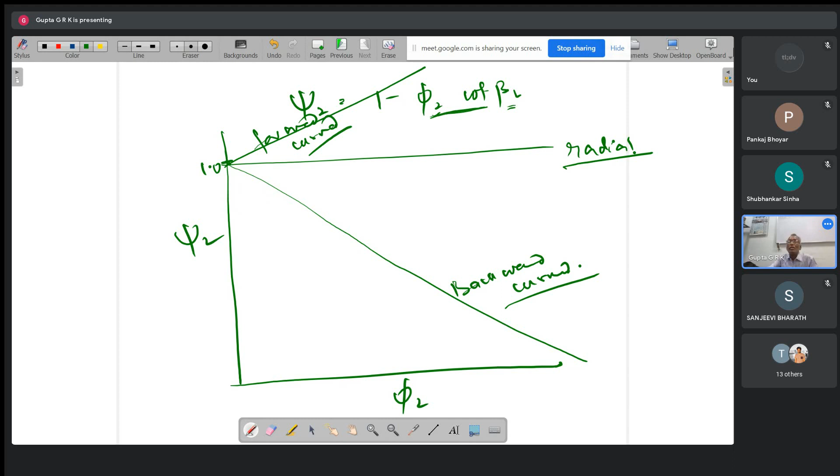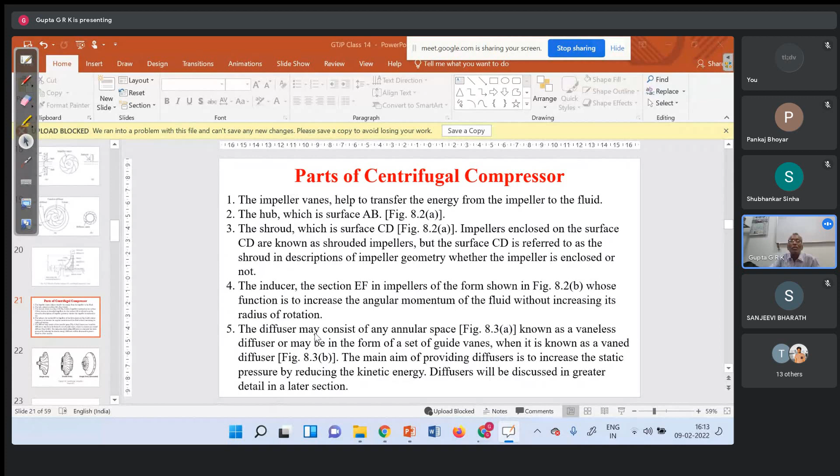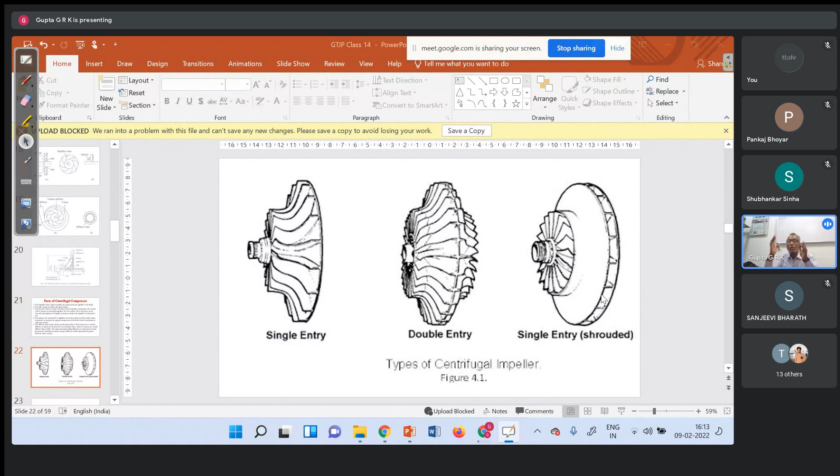Parts of centrifugal compressor: impeller vanes, hub, shroud, inducer, diffuser, like that. This is single entry compressor, and sometimes there will be double entry. And this is single entry shrouded, so they will be covered like that.

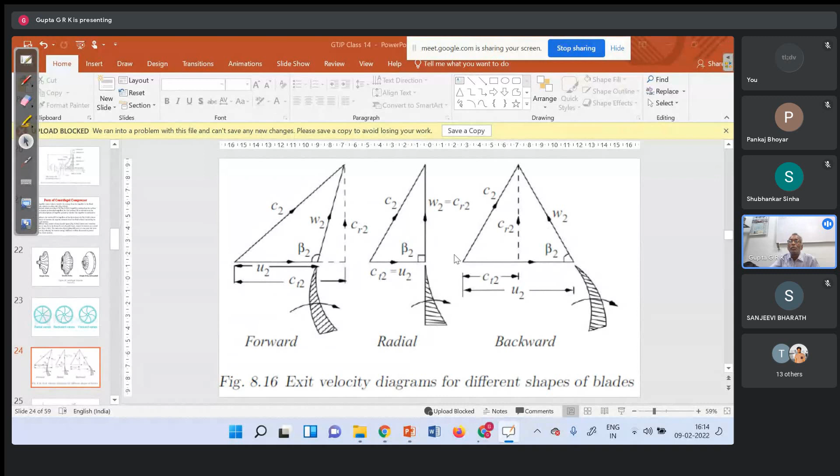These are radial vanes, these are backward vanes and forward vanes. So for forward, I will have an obtuse triangle, for radial I will have a right angle triangle, and for backward I will have an acute triangle.

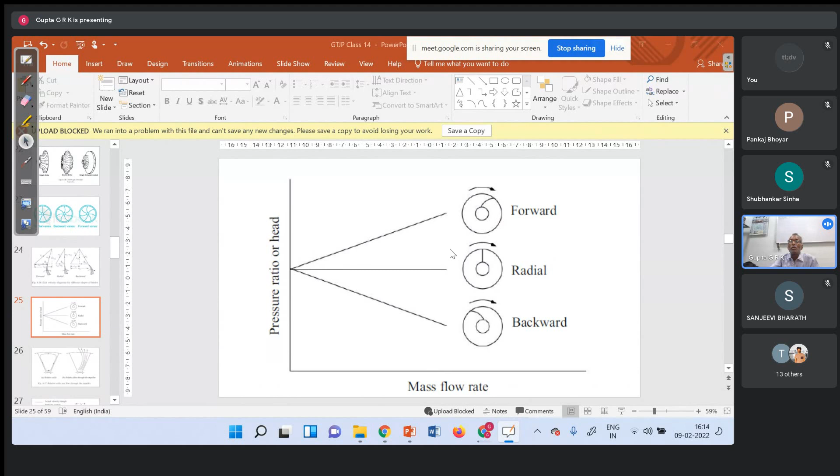If I draw the pressure ratio and mass flow rate, backward will be like this, radial will be like this, and forward will be like this. The remaining things I will explain in the next class.

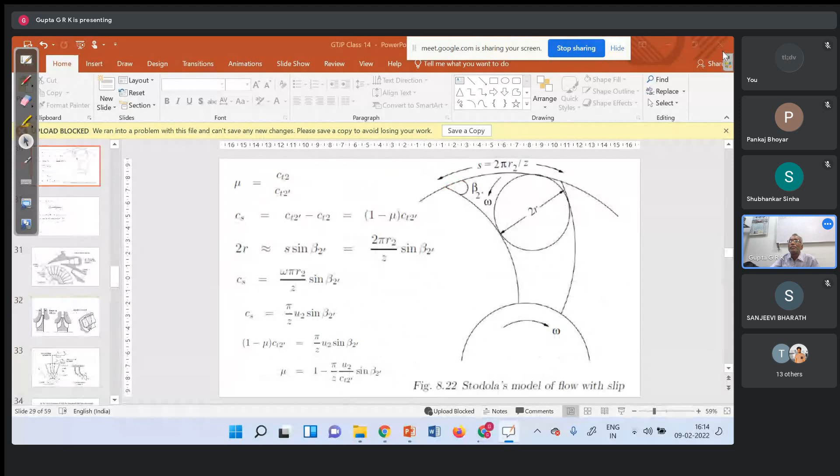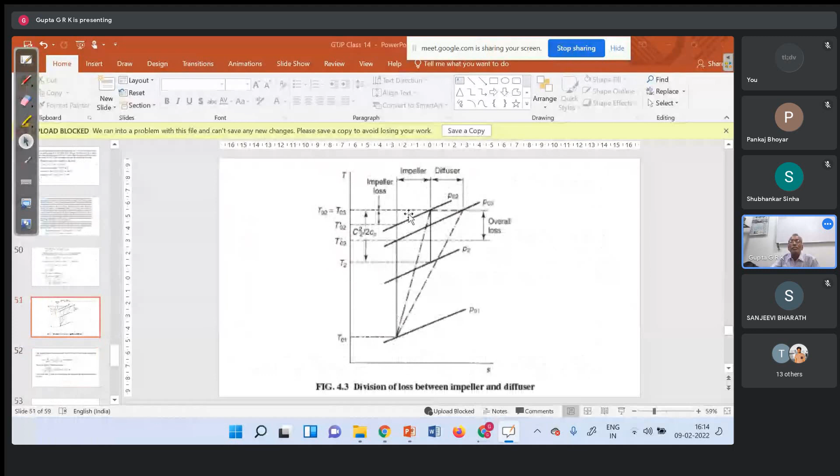Okay. If there are no questions, we will go for the story. Okay. Yes, sir.

So this is an interesting and a little bit touching story. The most important part of the body, the story name is.

It is narrated by one person, and he says, "My mother used to ask me what was the most important part of the body." From his childhood, whenever some opportunity came, she used to ask him that. Through the years, I would take a guess at what I thought was the correct answer. When I was younger, I thought sound was very important to us as humans, so I said, "My ears, mommy."

And she said, "No, many people are deaf, but you keep thinking about it, and I will ask you again soon." Several years passed before she asked me again. Since making my first attempt, I had contemplated the correct answer. So this time I told her, "Mummy, sight is very important to everybody, so it must be our eyes."

She looked at me and told me, "You are learning fast, my son, but the answer is not correct because there are many people who are blind." Stumped again, I continued my quest for knowledge, and over the years, mother asked me a couple more times, and always her answer was, "No, but you are getting smarter every year, my child."

Then one year, my grandfather died. Everybody was hurt, everybody was crying. Even my father cried—I remember that especially because it was only the second time I saw him cry. My mom looked at me when it was our turn to say our final goodbye to my grandfather. At that time, she asked me, "Do you know the most important body part yet, my dear?" I was shocked when she asked me this now, at this situation. I always thought this was a game between her and me.

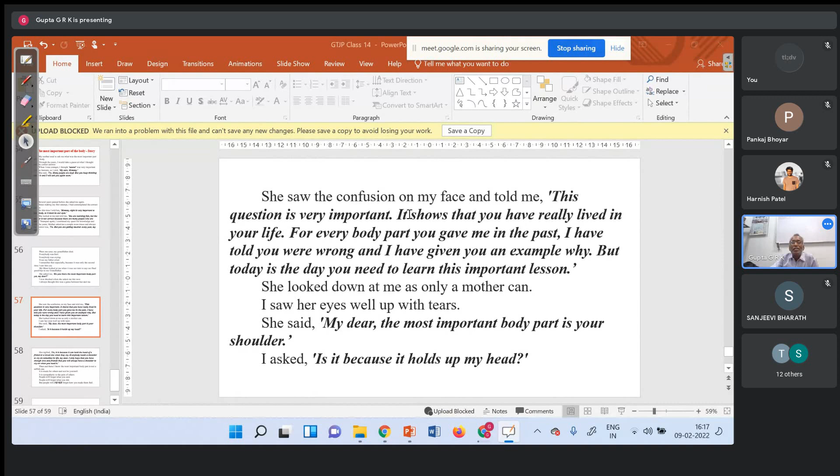She looked down at me as only a mother can. I saw her eyes well up with tears. She said, "My dear, the most important body part is your shoulder." I was surprised. I asked, "Is it because it holds up my head?" She replied, "No, no. It is because it can hold the head of a friend or a loved one when they cry. Everybody needs a shoulder to cry on sometime in life, my dear. I only hope that you have enough love and friends that you will always have a shoulder to cry on when you need it." Then and there, I knew the most important body part is not a selfish one.

It is made for others and not for myself. It is sympathetic to the pain of others. People will forget what you said. People will forget what you did. But people will never forget how you made them feel. Thank you, thank you very much.

Thank you, sir. Thank you, sir. Thank you. See you, sir. Yeah. Thank you, sir. Thank you. Thank you, sir. Thank you.